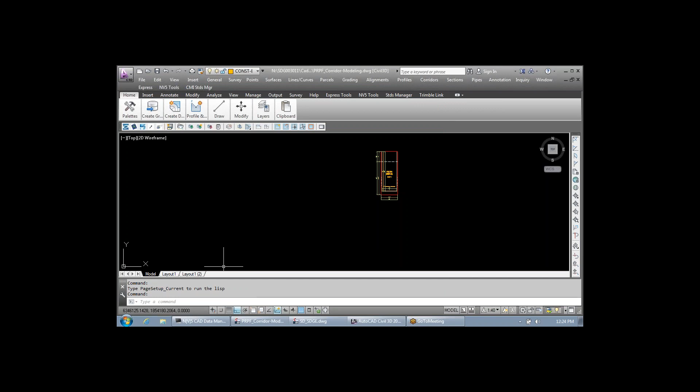So there's a couple that I wanted to highlight real quick, the first being page setup current. So we'll go ahead and load that. If you notice, on all my LISP routines, I will try to say 'hey, type this command to run the LISP.' So you'll always kind of see that on any routine that I write.

So what does this LISP routine do? What this LISP routine does is it will pick whatever the layout, the page setup that you have associated with your current tab, and apply it to all the other tabs in your drawing.

So for instance, this sheet is set up to 11 by 17 - probably could have picked a better drawing to do this on. Sheet 2 is set up to the OSE at 24 by 36. And what you're experiencing here is kind of the typical delay associated with a viewport of a file that has a lot going on. This is probably the most intensive file we're ever going to develop here outside of what Mark does, because Mark's special.

So this one's, as you can see, is an OSE. So we'll switch back to sheet 1. Hopefully it'll go a lot quicker, because hopefully I have it regened, but probably not. You haven't seen Kim's recycling facility drawing.

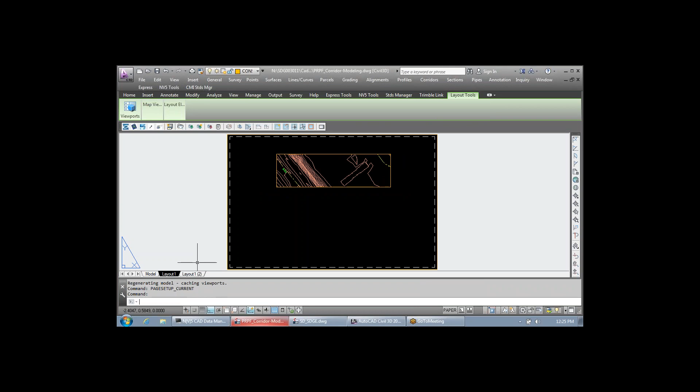So the LISP routine is page setup current. Click that. Now if I go back to sheet 1, or sheet 2, tab 2, it's now going to have applied that 11 by 17 page setup to that tab and any other tab I had in this drawing. So this can be pretty helpful if you have eight tabs in your drawing and you don't want to go through and assign the page setup for all of them. So you can see my page setup is now the 11 by 17 that was defined in layout tab 1.

So it propagates whichever tab you're in? It propagates the current tab to all the other tabs in your drawing. So now sheet 2 is set up that way.

So again, that was page setup current. I also wrote quick little LISP routines to take the page setups from the template and apply them to all the tabs in your drawing. These may be useful, may not be, just because these are set to palette A as your CTB. And what's the best palette to use? Everybody has their different preferences - some are SDGE, some are TransIng. So just keep that in mind if you apply the template ones, that they're all palette A.

So probably the best one is the page setup current, because you just set it up once in your drawing and then apply it to all of the sheets in your drawing.

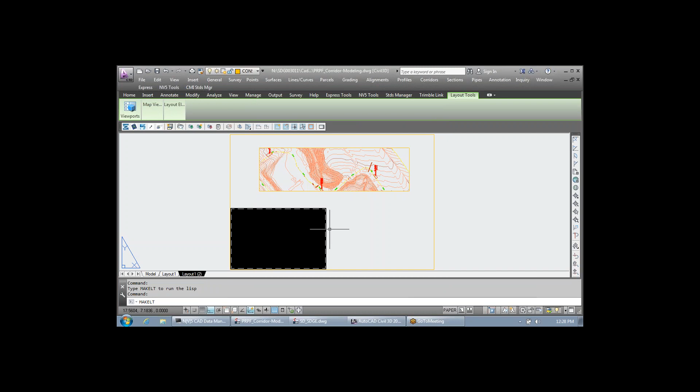Hopefully we've populated almost all of the line types you need in your drawing within our AutoCAD line type file. However, if you do need to create one, this is an easy LISP routine to create a line type rather than dealing with a text file and trying to figure out what means what.

This is kind of a LISP routine that automates that for you. So you can name it. Let's name one real quick: storm drain, text string SD. Let's increase the dash length. Text height, let's go 0.1. Text gap, we'll leave that. Text style, we'll go simplex. Dash type, continuous. And then we'll just create the line type.

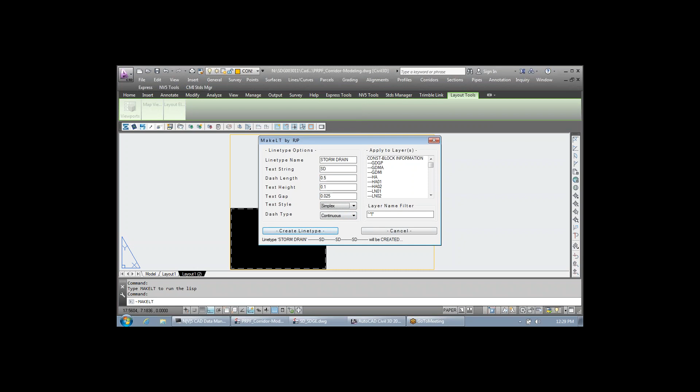Isn't that really contradictory? Dash type continuous? Dash type continuous.

Can you edit an existing line type with that? You can't, it would be nice. So if you didn't like the spacing on the one you just created, you have to create a new one? Yes, I believe. I can verify that.

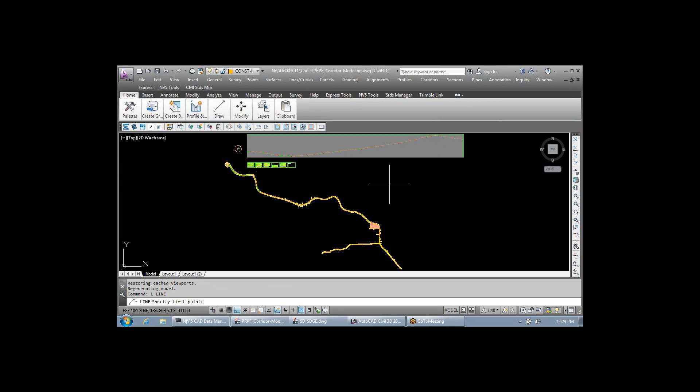Please ask questions. Where does it reside, and can you pull it back up and change it in the text file? It resides in the drawing. That's kind of the problem with line types, they reside in your drawing. You have to physically add the code to the text file. There is a LISP routine I have that actually extracts the line type to a text file to help automate that process.

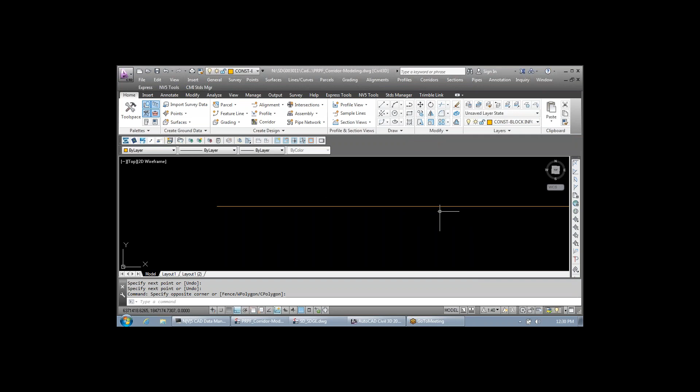All right, so storm drain, it's right there. So there's our line type that we just created. You can always go back and say, hey, that wasn't quite how I wanted it, and then change variables. If you name it the same thing, it will be redefined, so that would basically be the same as editing it.

And it does remember your settings from that last line type we created, so we could come back in here and change the text height to 0.2.

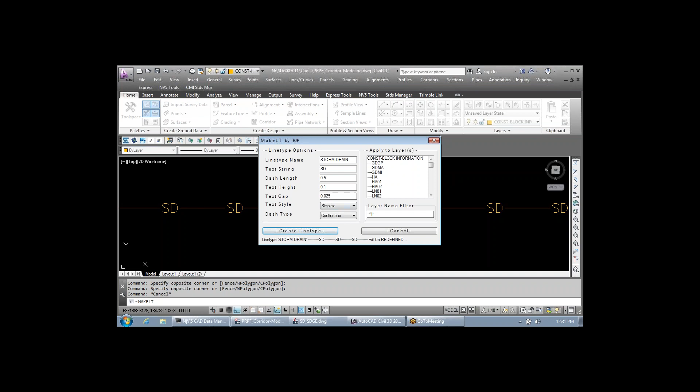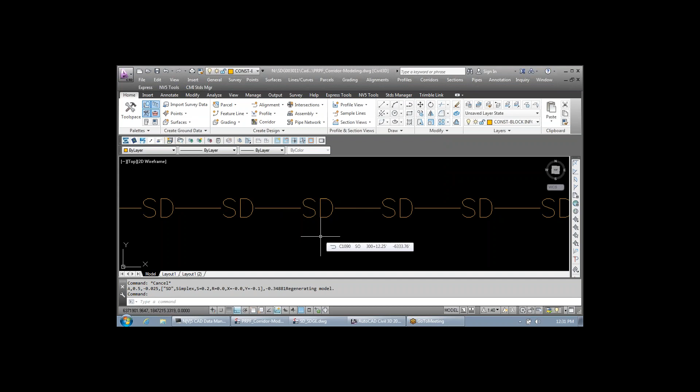Can you use characters on that? On the line type itself? Yeah, so what I did was this SD is a character string. Any characters? Yeah, you can use any character in here. You can use a little hat symbol, you can do dash, you can do equal, anything you want as long as it's a character.

Can you do a railroad? Yeah, sure, give me a week to develop it and get it right. So you can do whatever you want there. That's just a very useful one, yes.

So that's definitely a LISP routine that can help you out if you need to create a line type, want one real simple and quick, and don't want to go in and edit the text file. That's just a quick way of doing it.

A couple other ones I wanted to highlight here are change space copy. You guys have the change space command to put objects from paper space into model space or vice versa. This will actually copy the objects before you do that command, so it won't take them from paper space and put them in model space, it'll make a copy and put it in model space.

The other command I particularly like is VP outline. What that does is draw a polyline around your viewport in paper space and put that into model space. So if you want to see exactly where your sheet falls in your model space, that's an easy way to create that. It's very helpful if you're trying to set up your sheets.

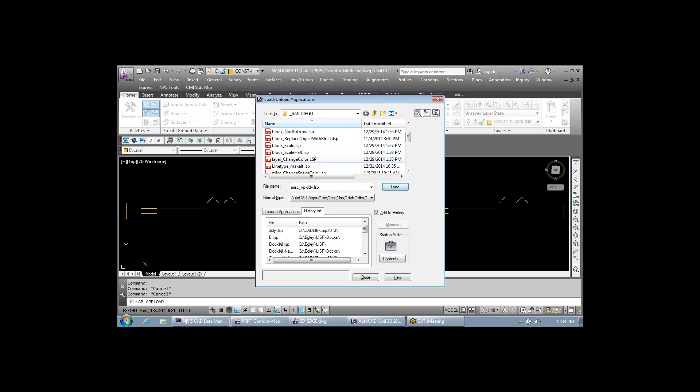As we develop, or as I develop, LISP routines, they're going to appear in the San Diego folder to help segregate them from the 700 plus LISP routines in our default folder. Something else you'll notice is my naming convention. I'll tell you what category it is, and then the name of what it is or does. You guys can look at those a bit.

A couple things I wanted to touch on. Get rid of this guy. What?

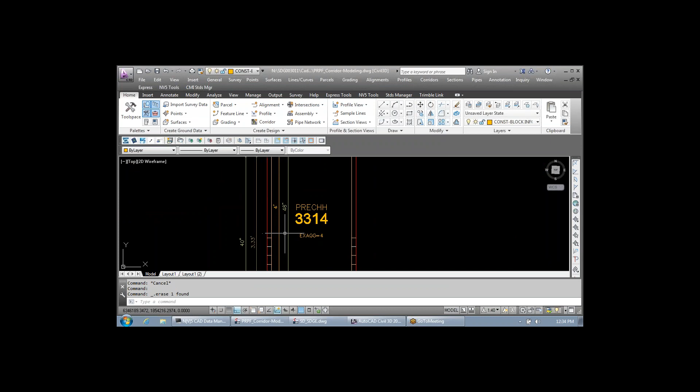So there have been a couple updates to the SDGE tools and blocks. You'll notice everything's dimensioned in both feet and inches, since a lot of times the standards switch on us, so everything will have double dimensions, both feet and inches. You'll also notice, under, I think I've got my template open here.

I've redefined all the parts that we use for our SDGE parts and pipe networks. What you'll notice is almost everything is grayed out except for the frame height, so only the frame height is a variable and the rest is a constant, which is actually quite a pain to do when you talk about structures. But this way it just eliminates a lot of user error. You can only really add this one specific part, and it's going to be with this variable. So those have been completely reworked.

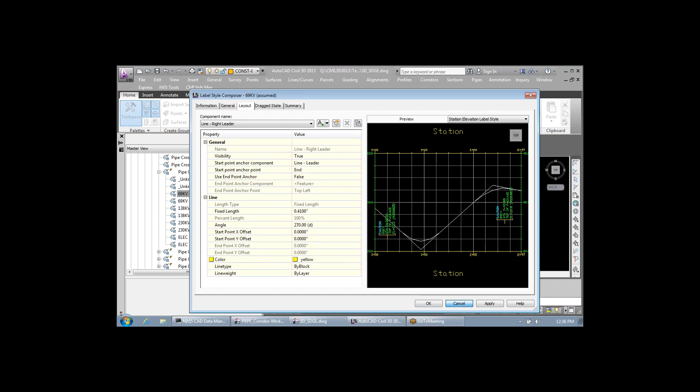The other thing I wanted to look at is when you do your pipe crossings for your profile and your trenching, these have been reworked to be more easily accessible. They're all going to be labeled pipe crossing and then the utility that it is. We also have an assumed and potholed style. The assumed will be to the 10th place on the elevation, and it will also say assumed. I know a lot of times we want to distinguish that and keep our pothole data separate from the things that we're assumed, so we now have styles that will help us do that and label them appropriately.

Something I wanted to talk about a little bit, I was going to show a sample, but we'll just kind of talk about it.

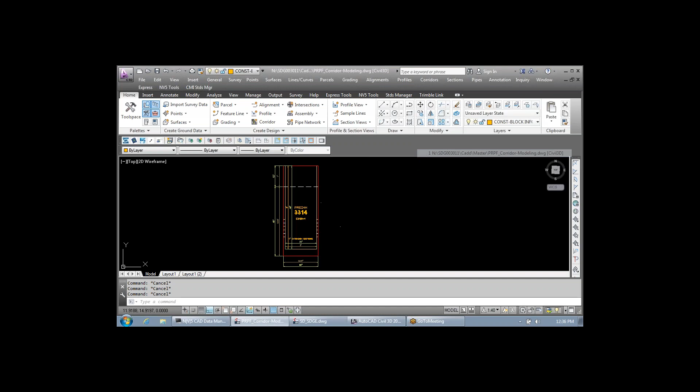Civil 3D is great in that it can automate a lot of processes and design for us. However, what I really want to emphasize and encourage you to do is check what Civil 3D is doing for you. Don't assume that it's doing it correctly. Run a simple check to make sure that it is. There's a lot of different applications for this. A lot of blocks come in automatically, a lot of parts for your pipe networks come in. Verify that that's the right part and the right size you're intending to use. That's why when you saw that SDGE vault structure, there's dimensions associated with it, so you can quickly verify that this is the right part I want to use.

But this goes beyond just simple parts and stuff like that, it goes to grading as well. One of the things I experienced about two months ago was I had a very steep access road, which is pretty typical of our SDGE site work. I had about a 25% access road with a corridor associated with it, and that corridor was going to build a 2-to-1 slope off of that access road. Well, I expected that slope to be 2-to-1, right? Because after all, that's what I told the corridor to do, build a 2-to-1 slope.

However, that 2-to-1 slope is only calculated perpendicular to your corridor, meaning on a steep street, that slope is actually going to be 1.8 to 1. Because the way it calculates that slope, it's a perpendicular section, and your contours are not perpendicular to your road, they're at a skew. So don't trust that the software is going to just spit out the right answer every time.

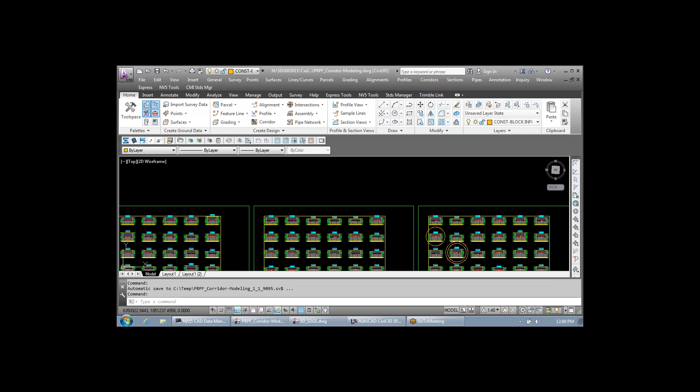Next thing I wanted to show real quick is I got a request from somebody, I don't remember who, about how do you explode a feature line when that feature line has a curve associated with it. So we'll go through that practice real quick. We'll draw a feature line.

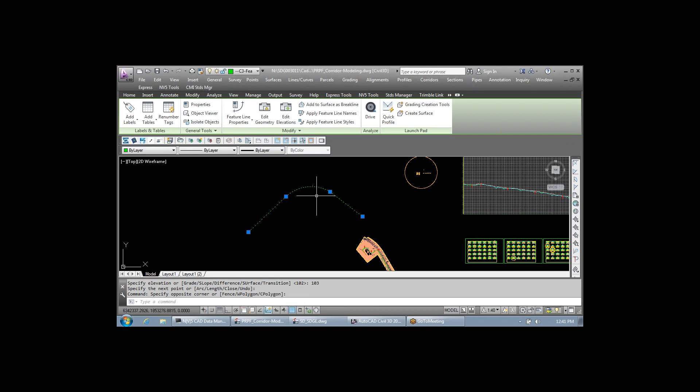And we'll give it some elevations because that's fun, and we'll throw an arc in. Alright, so there's a simple feature line. Now let's say I wanted to extract that as a polyline. Well, if I didn't know anything, I'd just go in and explode it. Except now we have all these little segments on our feature line, so that obviously doesn't work.

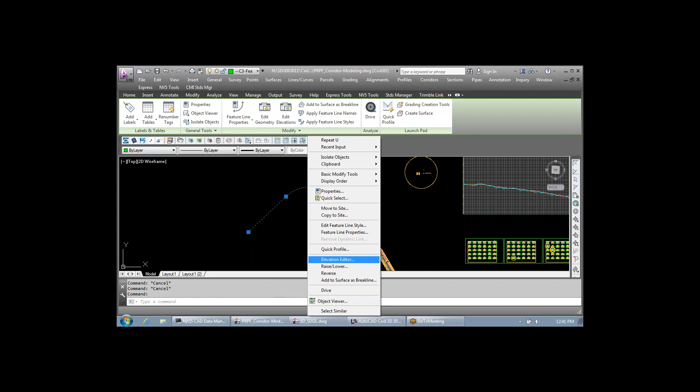So how would you drop it to 0? Would you go into Elevation Editor and edit all these? Could flatten not work? Well, we'll try it. So we'll flatten it. Flatten will take a while. And we still have the segments. So this is kind of the shortcut and clever way of doing it.

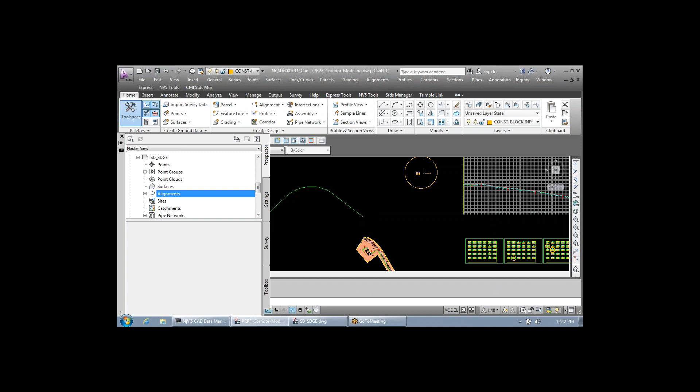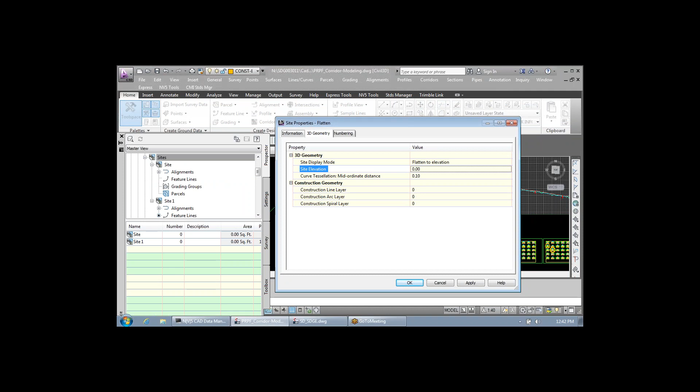Under your Prospector, under Sites, here would be the regular site that we have all the objects on. What I'm going to do real quick is just create a site called flatten, whatever. Under 3D geometry, instead of having it use the elevation, flatten to elevation and set that elevation to 0. Then hit OK. So I just created a site.

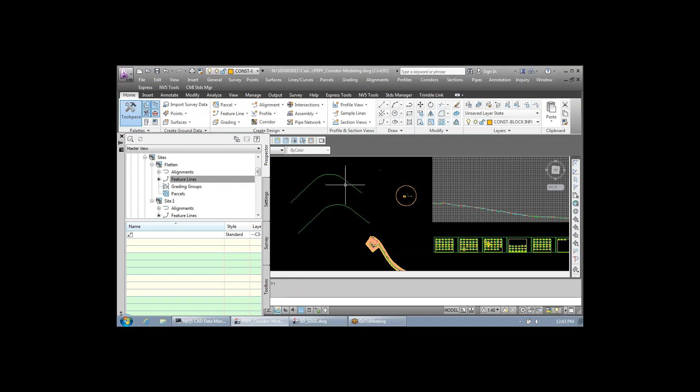Now what I'm going to do is copy that feature line to that new flattened site, deselect that one, select the one that's on this site, and just move it away. Now when I explode that feature line, it comes as a polyline. So now it's a true polyline. That's a quick and easy way to extract your line work from feature lines. I know some of us work with feature lines quite a bit, so this can be pretty useful.

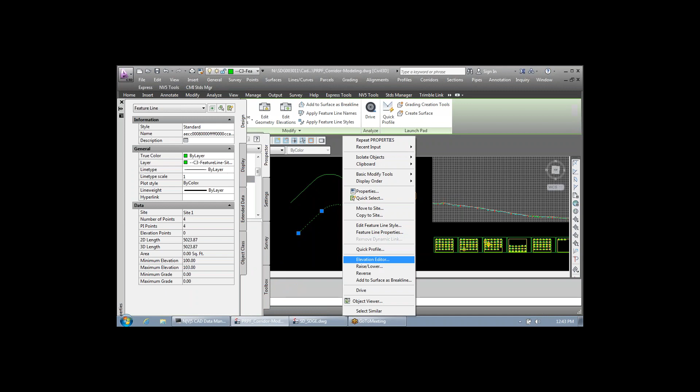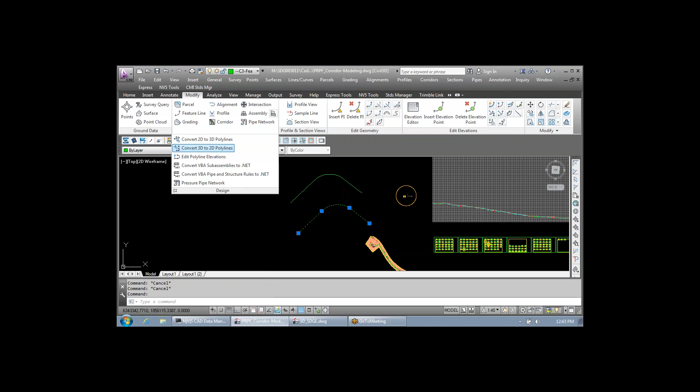The other way of doing it is you could actually go in here and physically edit all your elevations to 0 and then explode it. I haven't actually tried that, but let me check. Convert 3D to 2D polyline - it's not a 3D polyline, it's a Civil 3D object, a feature line, so it won't even select it. So this was the only workaround I was able to find, is to put it on a site that's flattened to elevation 0. Keep that in mind for when you're working with feature lines.

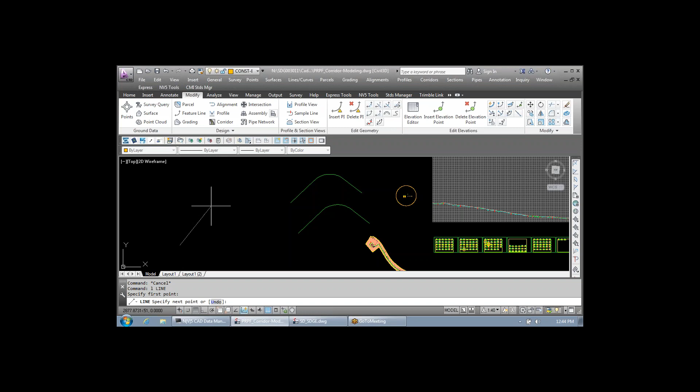Next thing I wanted to show is just a quick little variable that may be helpful every once in a while. A lot of times we offset our lines quite a bit, in particular if we want to offset like a daylight line to do a limits, an ultimate limits line. Scale is all screwed up - I think I did an offset of 20. However, you notice if I wanted this to actually be a true offset of 20, offsetting that line gives actually more area than 20 feet.

So there's a variable called Offsetgaptype, and you can change this variable to do different behaviors on that feature line. Right now the default is 0, and what that does is offset the two lines and fillet it with basically a radius of 0. However, we can change this variable - let's put it to 1. So what 1 does is fillet with a radius equal to the offset distance. So now when I offset my 20 feet, you can see what it did there. So that's my new line, now it's actually at a 20-foot offset from every point on that object we offset.

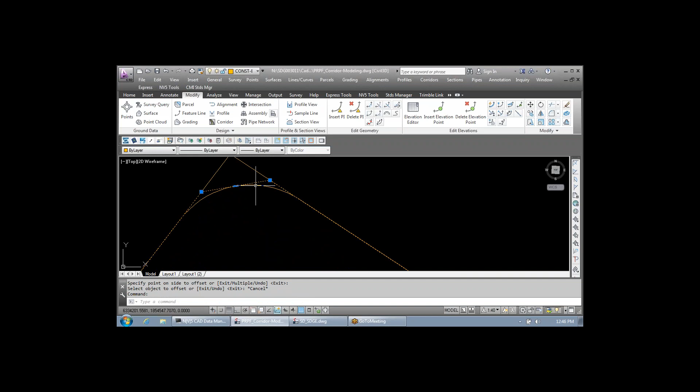The other thing you can do with that offset gap type, if you hit 2, is it chamfers the object. So instead of putting a radius, it's going to put a line. Just keep that variable in mind - it can save you some time if you're looking at offsetting some daylight lines. So that's offset gap type. I'll set it back to 0.

Is that only for feature lines? That's for polylines, just polylines really, because you can't offset feature lines using the offset command. Don't think so. I'm almost certain it won't.

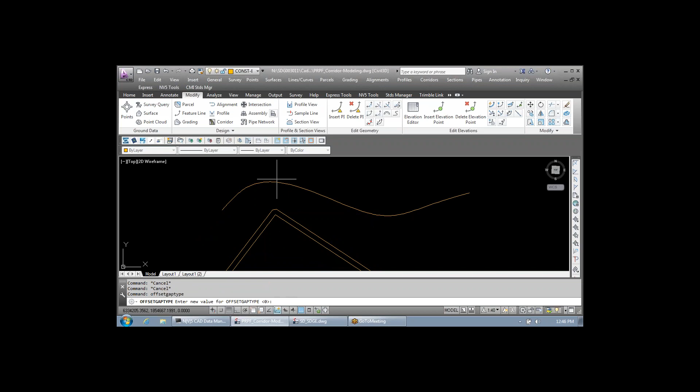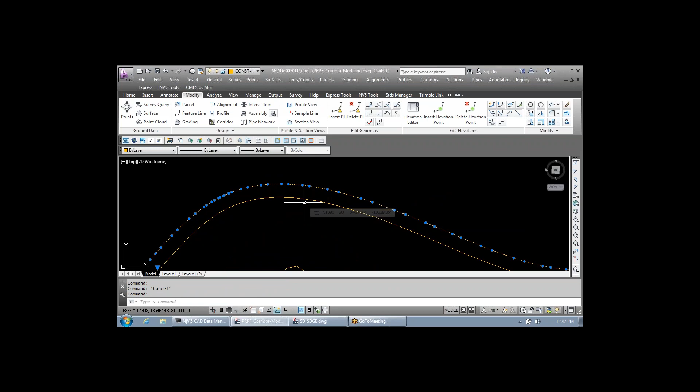Yeah, it's already a spline, but it's going to offset it. I'm not even sure what it's doing there because it's adding vertexes, but it's behaving weirdly. So yeah, I would not use that on splines. I don't like splines in general, but sometimes they are required. All right, they'll draw them all day long.

A couple things I wanted to talk about in terms of drafting. To edit block attributes, we use them quite a bit, and a lot of times our block attributes can be rather complex within our block. We'll have several attributes, and it'll bring up this dialog box, and we'll have to enter through to find the attribute we want to edit. Rather than doing all that, if you hold down Ctrl and double-click the attribute you want to edit, it will behave as text, so you can edit it like text rather than going through the edit attribute dialog box. You can just Control double-click and it will behave like text, and you can edit it on the fly.

The same thing goes with layout tabs. I think, Robert, you mentioned this, that you can Control and double-click and change the name of a layout tab rather than having to switch to that tab or right click and rename. It just makes things a lot easier to hold down Control and double-click.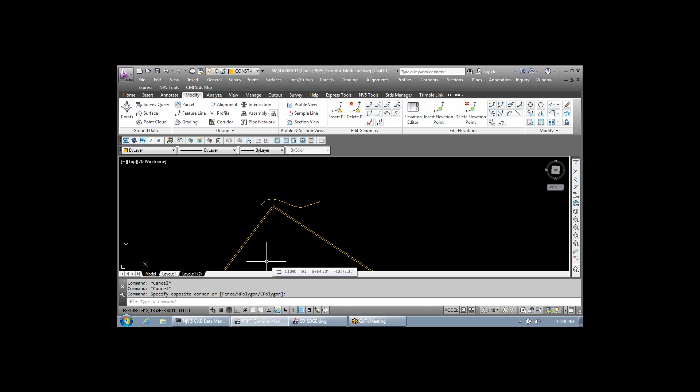The other thing that you can do is Sheet Set Manager. You can have Sheet Set Manager control the tab names. You can also have it control your sheet numbers and a lot of different things. We will have a lunch and learn about Sheet Set Manager shortly, and using fields to populate some of that data controlled by Sheet Set Manager. The person who kind of mastered that a little bit is Anna. If you ever want a tutorial, she'll show you what she did on Melrose.

On that project, we were changing sheet numbers almost daily, and it was not a hard thing. It basically took her about 10 minutes to change the entire sheet set numbering system on 150, on sheets - 180 sheets. Yeah, okay, and basically she just went through and boom, it's done. So we will talk about that here, because it's an important workflow we need to discuss. Your sheet number should not be a block attribute or text on your title block. It should actually be a field that gets populated using your sheet set. So just a side note.

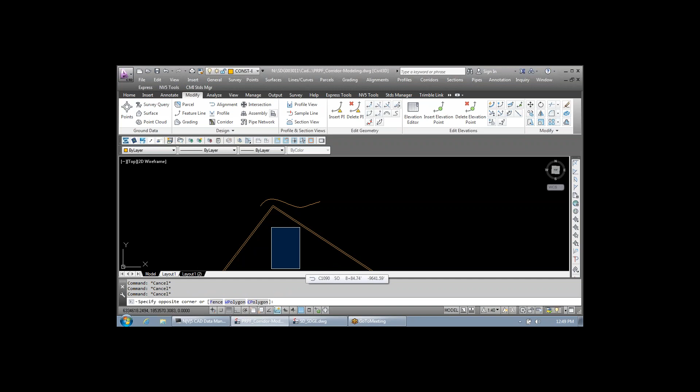A couple tips and tricks that Robert kind of brought up. One thing we may want to disable on everybody's computer, depending on how you guys feel about it, is what happens when you double-click on a viewport. You go to Viewport Max, and it takes over your whole screen. Is there anybody here that actually uses that? No. How many of us find it annoying and disruptive?

I don't know how to get out of it. You can always get out of it by just going back to your paper space. And this is the problem with it - it takes a long time if you have a very complex model, like I do in this sheet I'm working in. So you could hang up your system for 30 seconds there. And how do you get out of it? Just PS - oh okay, that closes it. Escape also works. So there is a way to disable that.

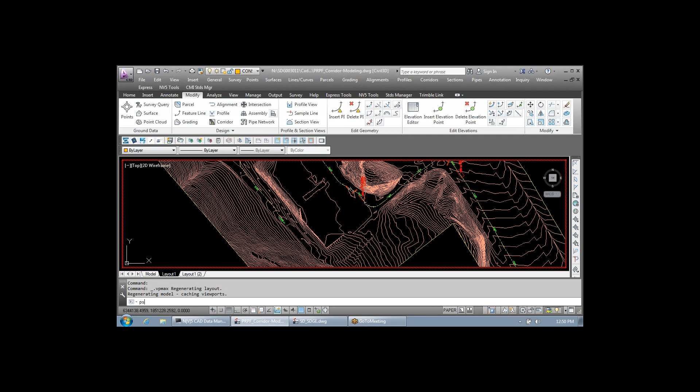I am going to show you real quick, but if you'd like to disable that, just come ask me to do it for you. I will try to incorporate it in my next update - I think I can do that, I'm not sure if I want to yet. But the way we would actually disable it is a double-click action. We'd create a new double-click action, call it viewport - might help if you spell it correctly, because it is important - and the object name is a viewport. Then we're going to associate a command with this action.

So that's how you actually disable it. I'm telling it that any double click on a viewport will just do a cancel action. It will override the VP Max command.

It doesn't work, I tried undefining it. It doesn't work. I think now if I double click, nothing happens because it's just using a cancel command. So that's kind of a useful utility to do. I tried to undefine it, and because the command for it is actually _.vpmax, it wouldn't undefine. I don't know why.

So that's something that may be helpful. Can you change that to make it not viewport instead? Yes. But it wouldn't toggle it. No, just turn it off. I want to toggle it. I don't know if you can, because it's a modify property that you touch. I don't know if there's a command to do that natively. You could write a macro to do it.

We could write a macro to do that. Something else that might be helpful to you guys is to pan orthogonally. If you enter the pan mode and then hold down the shift key, you're now panning in an orthogonal fashion. Just be careful using that command because you can easily enter 3D orbit using your mouse button. So be very careful when using that command, but it is there. I wanted to share that with everybody.

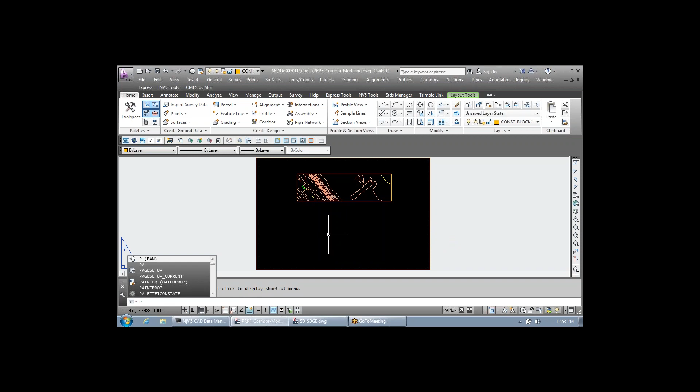You can also draw lines, like start a line, with shift. Yeah, shift can be used to do a number of things with ortho. The one downside is you have to enter the pan command before you hit shift. If you hit shift and P, it doesn't do anything. You have to actually physically enter the pan command. This mouse isn't set up correctly, but you have to actually be in the pan command and then hold shift down. Just keep that in mind.

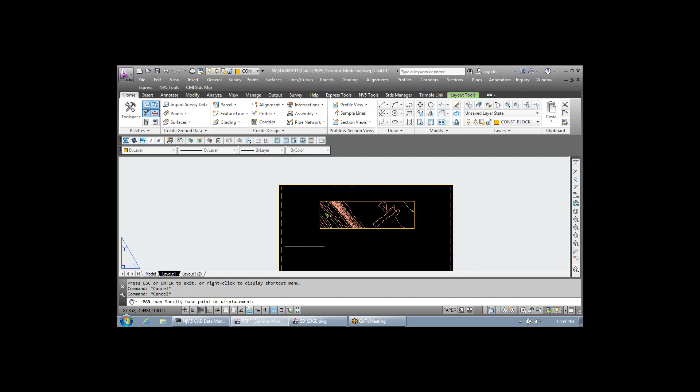Doesn't the dash pan command do the same thing? I think it works in Viewport. Try dash pan in Viewport. Check. Oh, that zeroed it out. No, dash pan doesn't work. Well, yeah, there's some command that actually does that, I've used it before. If you think of it, let us know. But pan and then shift, that works pretty well.

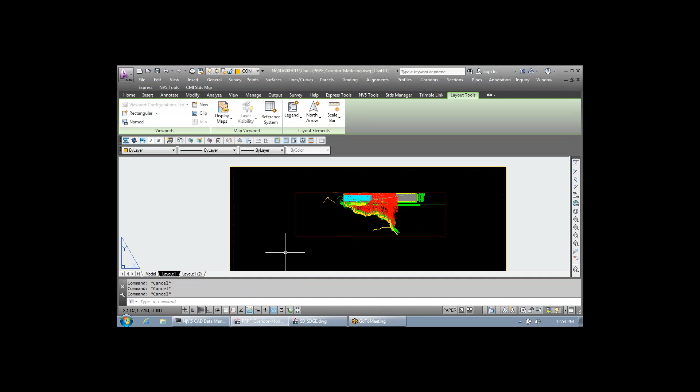Upcoming developments that I'm going to be working on, a couple things: point markers for our points. I will be working on those shortly. Right now they're very generic, they don't actually represent the object, they're drawn at some random scale. So I will get around to fixing those, and I will be drawing those point marker blocks to the actual real-world dimensions, and from that we can size them up as needed depending on your drawing scale.

I realize that sometimes if I draw an 8-inch water valve as 8 inches, you're not going to be able to see that on the 40 scale. But if I draw it at 8 inches, then we can add an exaggeration factor to certain things. So that's how we're going to tackle that. Everything is going to be drawn to real world, and we'll exaggerate based on however you want them to display.

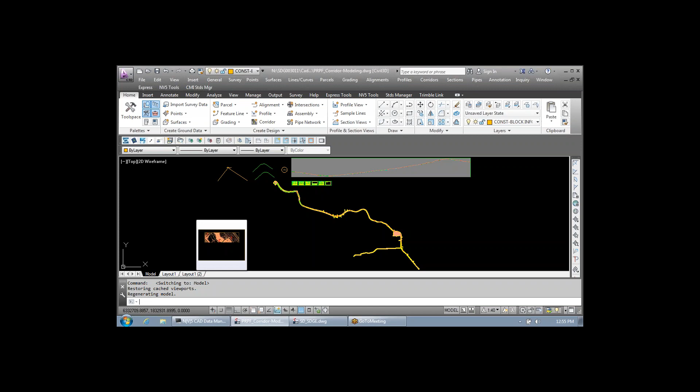Until that time comes, you may say, hey, I don't want any of these symbols, just give me a basic X and I'll deal with the symbols in another way. You can do that. There is a point description key code set for just all basic X's as your point markers. Under your points, description key sets, there is a set with everything set to just the basic X as your marker instead of using the blocks. So if you're importing a large set of points and just want everything to come as an X, this is the key set you would use. Just keep that in mind.

You also see that there's one here for Sempra Gas. For those who are going to be working in the gas division, there is a key set for the gas codes.

One of the other things that I've been working on is the next update I push out is going to be quite substantial. One of the things it will include is backing up some of your user AutoCAD variables.

Every time you run the update, it's going to throw a folder in your G drive folder under backup, AutoCAD Civil 3D 2013. It's going to put the date that you last ran it, and then it's going to back up some of your custom settings, like your CUI, your profiles, and some other things.

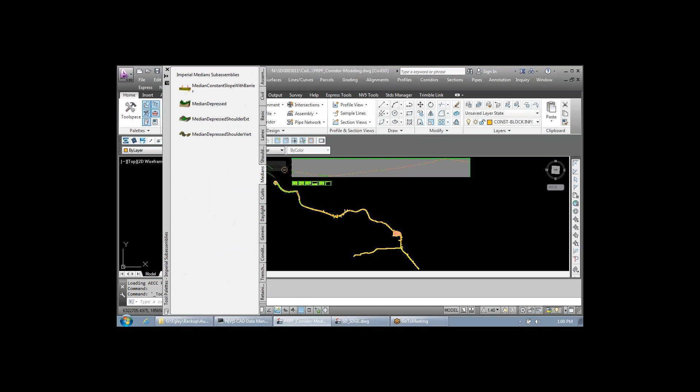So you'll notice we went over some of this - this didn't load all the tabs. Let's see what we got in here. We have some custom curbs that we've developed - the B1, B2, B3 curbs. For the medians, we've got all of our G1, G2. We've got all those defined in here.

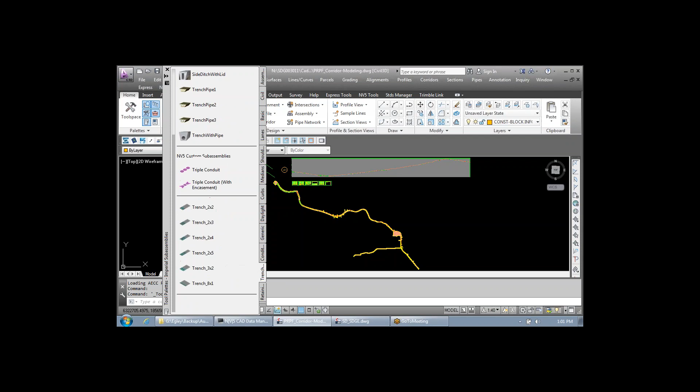One of the things I've been working on is really focusing on the SDGE underground. So we've got some trench sections to go through now - trench sub-assemblies, and what these look like are just your basic trenches with your conduits. Colors don't really come out very well here, but here's your trench, and all these have customized values associated with them. So this is kind of what they look like.

I'll probably change it a little bit to get rid of the trench width and trench depth. I'll probably have those as preset values rather than user input.

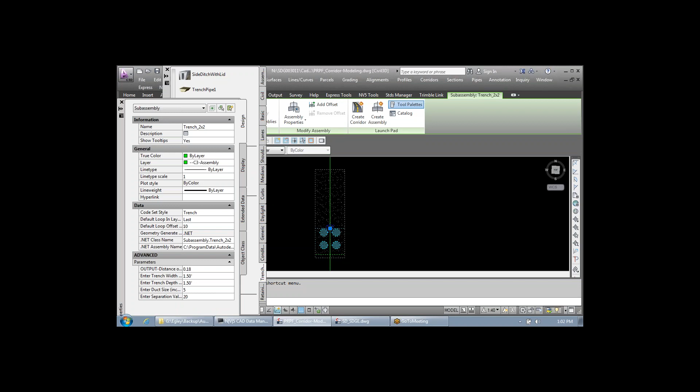But yeah, go ahead - what about the conduits? So the conduits, the way these work is these are your predefined 2x2, 2x3, 2x4. We can add more as needed. So the first variable you see here is an output variable - you can't change it. What that is, it's the distance between the bottom of your spacer and the bottom of your trench. That's a calc value that's returned based on some input.

These two variables will probably go away - I'll probably just hard code them within the assembly to take away some user error. So let's say we're not using a 5-inch conduit, we're using a 6-inch conduit, so we'll enter 6.

Everything changes accordingly. So if you need a wider trench or a taller trench, all those values adjust accordingly to a table that is predefined within this code. So let's also say we change the separation to 3 inches, which on this spacer detail is represented by a 30. So we'll change it to 30, and everything adjusts accordingly.

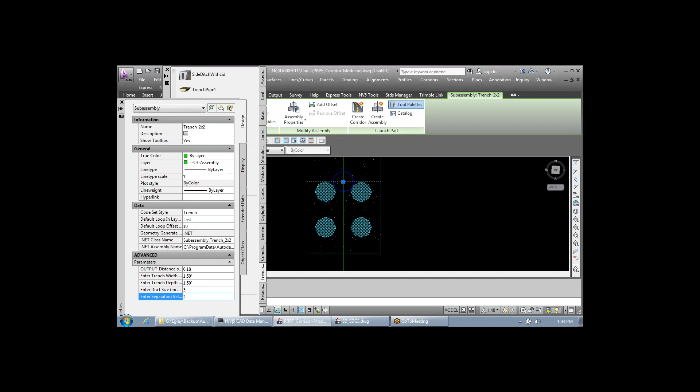I was referring to the conduit tab that you have in there. Your conduit tab. On these? No, on the tabs. You have trench, conduit. Oh, that's conditional. So that's just a conditional sub-assembly that's pretty specialized, and I don't anticipate too many people getting into them. They are built into some of our NV5's custom routines.

I thought maybe you had some set up for like a complex curve. So unfortunately, conduits is the one area that has kind of been ignored in Civil 3D. There's not a good way of modeling conduits. Pipe networks are great, but they don't give you the ability to really follow a surface or follow a profile. Each time you do a grade break, it'd be a separate pipe segment. So conduits is kind of this ambiguous hole that Autodesk has not really defined well for us. So the workaround that I'm using right now is I'm building a corridor for these conduits.

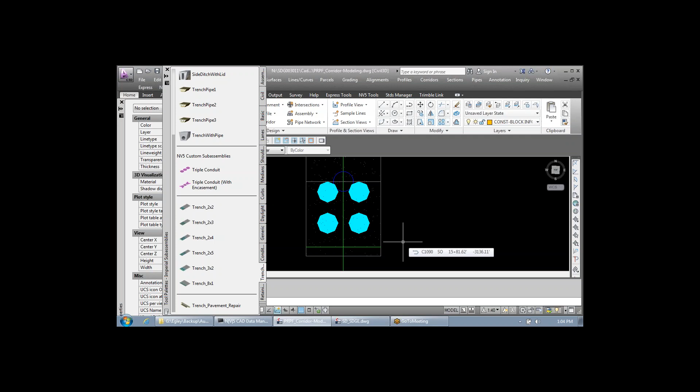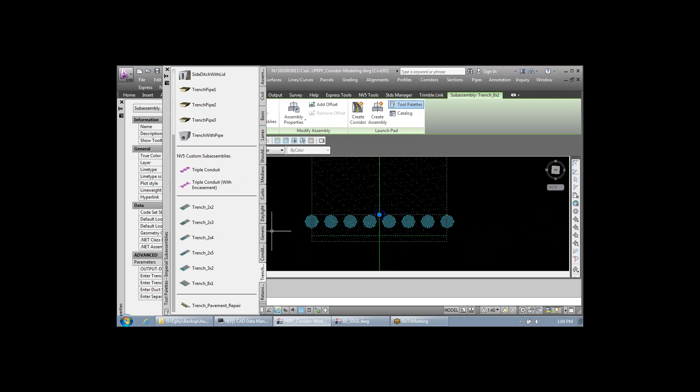Yeah, so we can do anything you would like on these conduits. So here's all your different varieties that we can build. We can build just about anything with any duct size, any separation. They're all there, especially if we lay them flat. Sometimes we need to lay them 8 flat. Obviously we'd need a wider trench to do that. So you can set it wider, or I'll hard code it, which is what I'll actually do.

So transitions happen the same way they would happen within a corridor. It's going to take the last point that you specified on your region and the first point on your next region and kind of connect those 2 dots. So it's not the best application for it, but it's the only way that I know at this point how to model a conduit. So the transitions are still pretty rough, but it will kind of demonstrate. It won't really do your conduits, but it will do your outside trench. It will do that transition correctly. It just won't transition your actual conduits.

Necessarily in the right order. Yeah, because your transition is going to be different every time. I mean, I could look into that a little bit more if I match up my point codes on my conduits. If we need to get to that detail, we can take it to that detail. What I'm going to say is, at this point in time, we're probably not going to use this functionality to that level of detail, just because the computing resources and time for these corridors to generate is rather extensive.

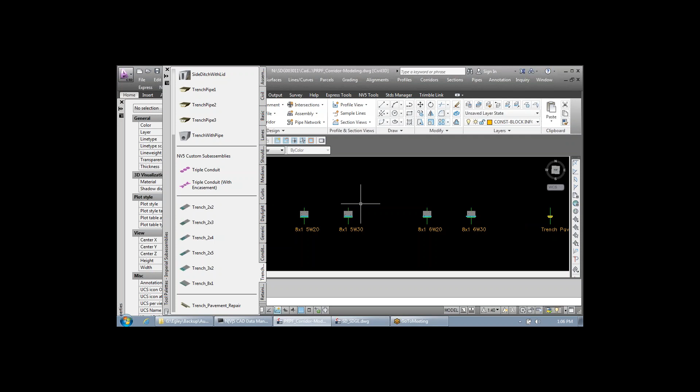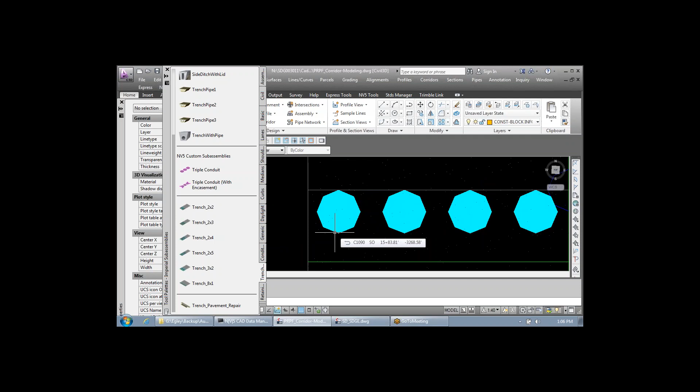And that's one of the things that you'll notice is that, well, these aren't true circles. They're actually arcs. And if I made this a true circle, I'd have that many more points, and that's that many more points on your corridor, and it's that much longer to rebuild. And for this job, this is like a 7-mile trench. So you can imagine the number of points it's trying to calculate every time something changes. So there's always a fine line of precision versus performance. And in this instance, I'm kind of choosing performance over precision because I don't quite know how we're going to use this technology quite yet, but it's definitely there for us to use.

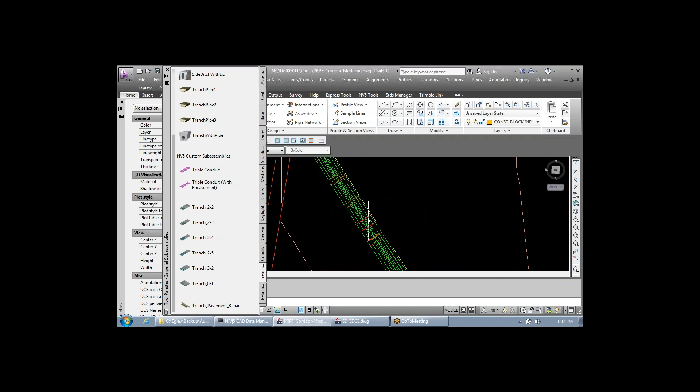So some of the things that we can do is, obviously it's going to help in your plan view. You're going to see your trench if you have your corridor on. If you have a change of section, let's say on this project we actually flatten out to 8 wide, you're going to see that reflected in your corridor model. It will kind of help you double check your crossings with some utilities and other structures, because now you'll actually be able to see the width of your trench changing.

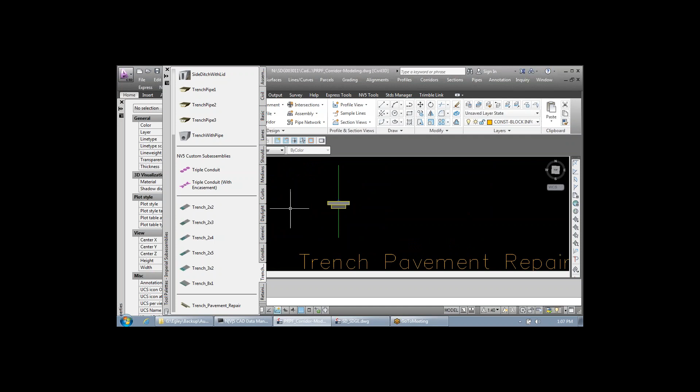And then obviously the next thing we can do is we can create sections of all this stuff. Now what you see here is we've got our trench, but we've also got a pavement repair section as well. So talk 2 seconds about that. So here's your trench pavement repair subassembly. So on this guy, it's located right there. There's your trench pavement repair.

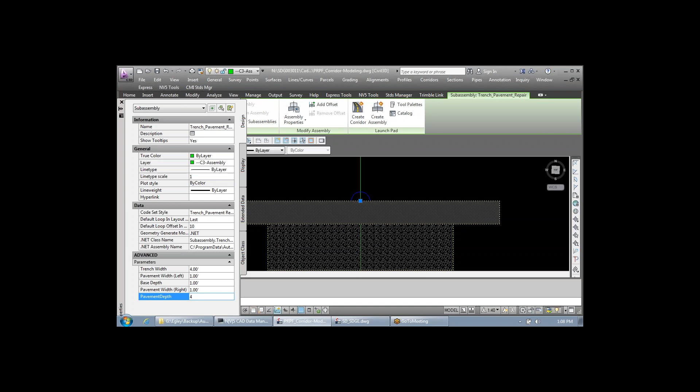So you've got your trench width, which we could change to 4 feet if we so desired. We could also change the T section, left and right - that's the variable for the T segment. We could change that to a foot, just for some exaggeration. We could change the base depth to a foot. Pavement on the right side we'll put as a foot, and pavement depth we could change to 4 inches. So all those things are adjustable.

So you have this section now. The one thing I do need to fix is I don't have my sub base following the slope of my pavement yet, so that's something I need to work on a little bit. But for the sake of this argument, it works pretty well.

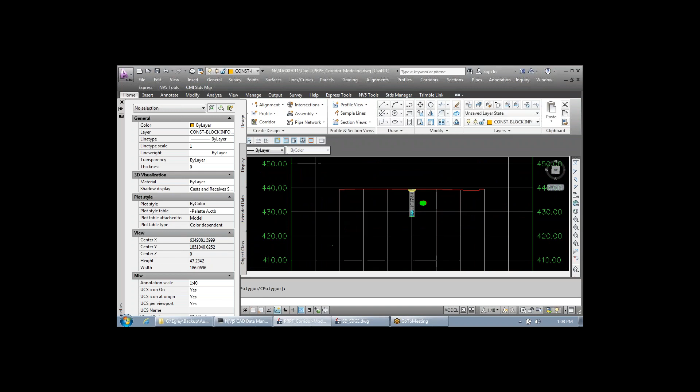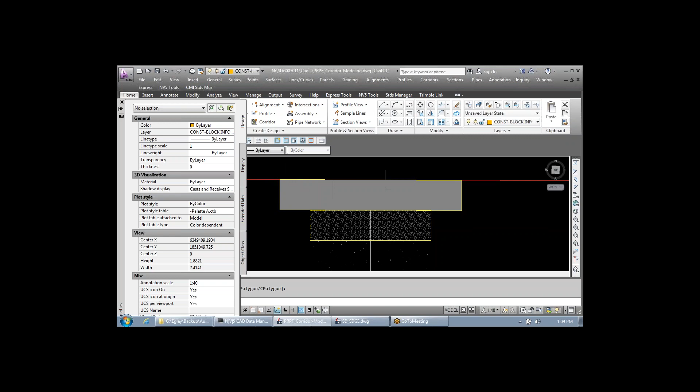So the way this corridor works is we have a profile set at the top of our conduit, so that runs according to our profile. Then the trench comes up in daylight to the existing surface. We also have our trench repair that takes this point and this point, and shoots a straight line between the two. So here's what I'm talking about - my base section doesn't quite follow my asphalt. I've got to change the way I code it.

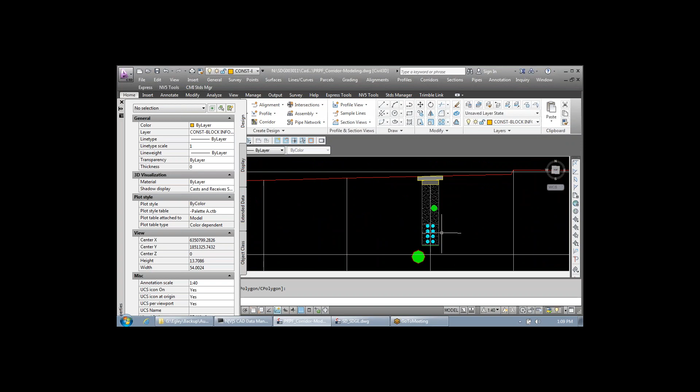So you can create all your sections for your entire trench this way, and obviously this is a great tool when you start looking at some crossings and such like that. Here's one, just a random section - this was at like 47, where we actually have a utility crossing within our trench and then also below our trench. So sometimes it can be helpful to identify those things. Also create all your different cross sections and use them how you desire.

You can also go into a 3D orbit on this. However, I would not recommend it on this corridor because it's 7 miles long. But we could very accurately model in a 3D environment certain areas that we were concerned with crossings or other constraints - we could look at that small section and do a 3D model of it.

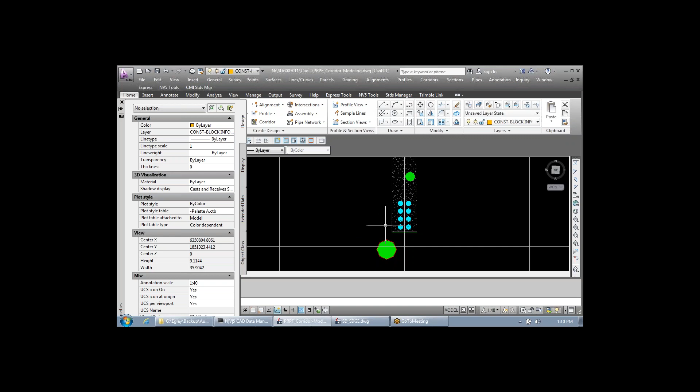Jarrod, you said that's a crossing that's more like a longitudinal. Which one, this one? Both of them. Wouldn't they be going to the right? Yeah.

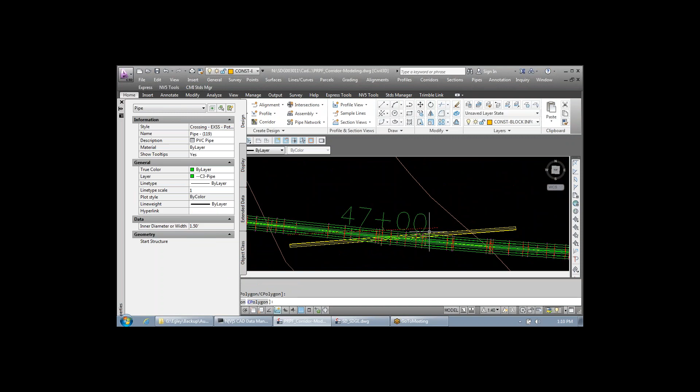So let's look at 47 real quick. 47 should be somewhere here. So we're cutting right here, so you can kind of see that's the one that's in the trench, and I think there's one here as well. Yeah, that's a sewer pipe as well. So they kind of do run.

So those are the type of things that we've got going on, and just further development that we'll continue to refine. If you see or have any ideas on tools that you need developed, please let me know. Assemblies are pretty easy to code, they're pretty fast, so if there's something you need modified, just let me know and we'll develop it.

We got a quick tip that sometimes when you VPN in using your 2 screens to come back, some of your screens may look like they're lost. Jarrod helped find that it was a control window - Control+Window+arrow will help you find that window that gets lost. Sometimes it'll get lost behind something or hidden and you can't find it, but you're opening the window - where's my window? You can bring any window back using control window left and right, moving the window onto your screen. A lot of times that happens if you're set up here at work with dual monitors and you go home on a single monitor - all your windows that were on your dual monitor aren't displayed at home, so you need to bring them over using control window and arrow key.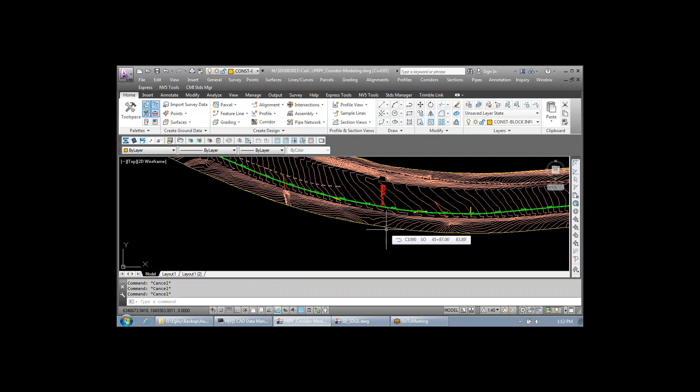On that corridor you just did, can you split out a report on how much you take down on the concrete and the asphalt and all that stuff? We could, yeah - we could definitely generate reports from all of our corridors, as long as the material's been defined. Thank you, Jarrod. Thank you.

Thank you. Hey, on a follow-up to Scott.